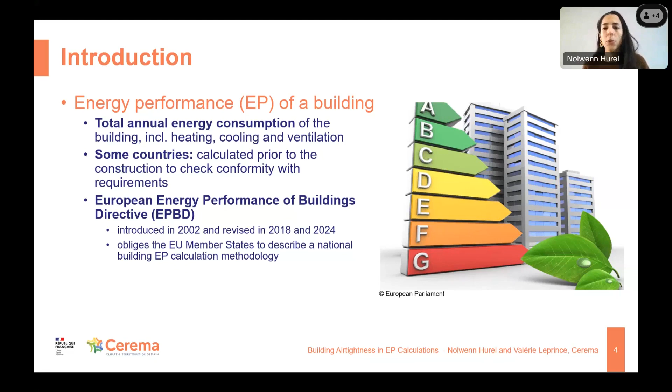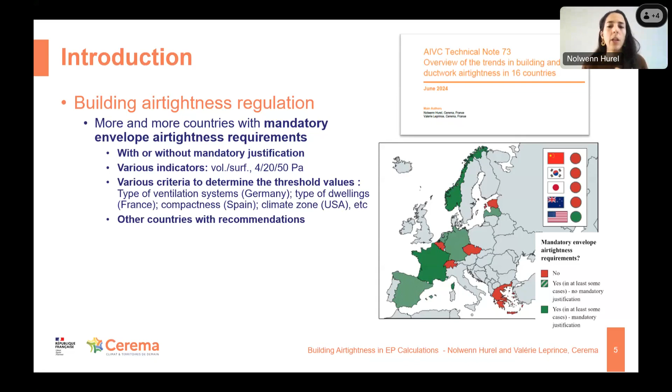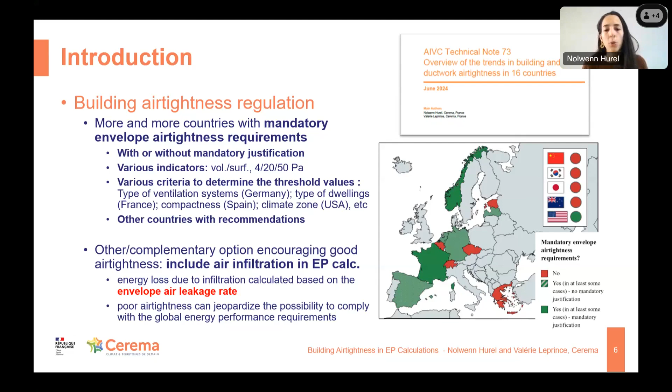Another, or complementary, option to encourage airtightness is to include the air infiltration in the energy performance calculation of the building. For this, the energy loss due to infiltration is calculated based on the envelope air leakage rate. This is how airtightness is included in the EP calculation. Then a poor airtightness can jeopardize the possibility to comply with the global energy performance requirements. So this is how it also encourages good airtightness.

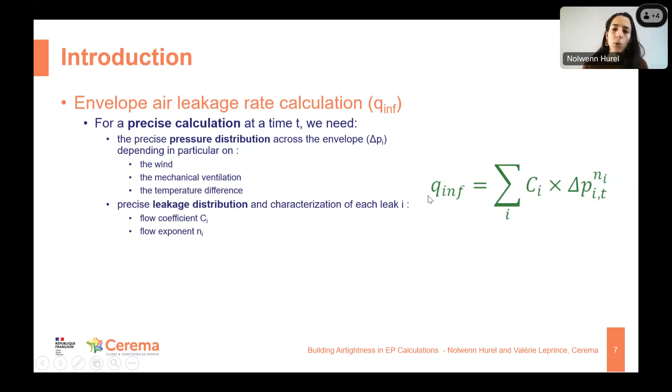So as I said, we need to calculate the infiltration rate to have it inside the energy performance calculation. For a really accurate calculation of this infiltration rate, we need the precise pressure distribution across the envelope, which depends on the wind, the mechanical ventilation, and the temperature difference. We also need a precise leakage distribution and characterization of each leak, so the flow coefficient C and the flow exponent n. So in theory, we should sum up the leakage of all leaks to have the total infiltration. But in practice, this is quite impossible.

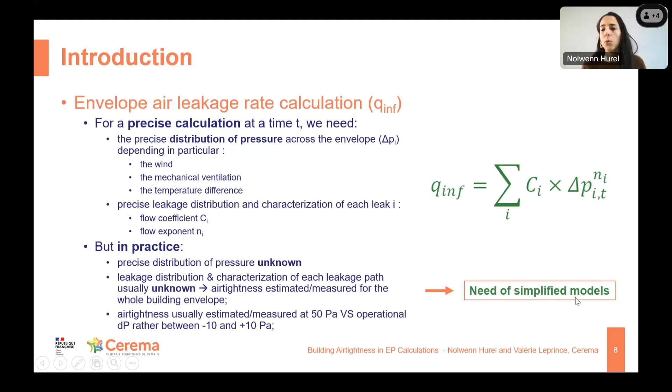We don't have a precise idea of the pressure distribution of a random building, and we don't know the leakage distribution and the precise characterization of each leak. So usually what we know is a global estimation or measurement of the whole building envelope, usually at 50 Pascal, whereas the operational pressure difference is rather between -10 and 10 Pascal. So for all these reasons, there is a need for simplified models to include this infiltration rate inside energy performance calculations.

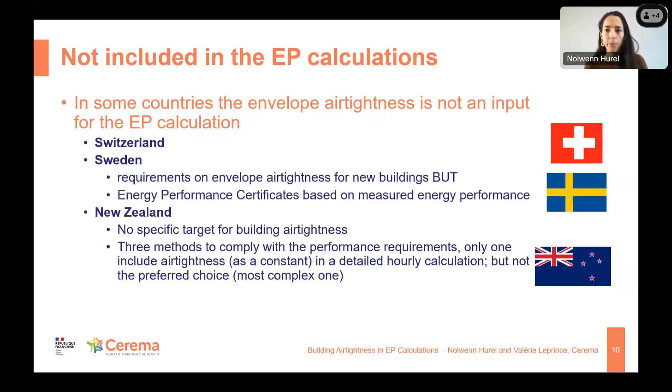Now, for the countries that do include infiltration and airtightness in the energy performance calculations, the simplest model is the leakage infiltration ratio. It is a linear relationship between the infiltration rate, the estimation of the real infiltration through the year, and the leakage rate at 50 Pascal, which is what is usually estimated or measured on site. It is used to estimate the building steady state infiltration heat loss, usually applied in semi-steady state calculation methods. It gives a quick estimation, but with significant limitations, as it is very hard to define the proper N coefficient.

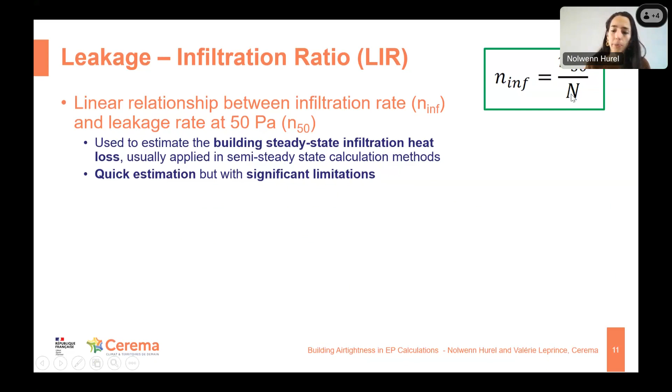One country that uses this model is Belgium. So Belgium is an interesting country for airtightness because they do not have a requirement on minimum airtightness level, but they have a very disadvantageous default value in the energy performance calculations for airtightness if there is no test performed. So as a result, in Flanders, they have a requirement on the global energy performance that the building must achieve. And because of this very disadvantageous default value on airtightness, all buildings are actually tested to have a better value and to be able to comply with the energy performance calculations.

And the coefficient they use in Belgium is 25. But of course, it will be more or less correct depending on the buildings. In Finland, this coefficient depends on the number of floors, ranging from 35 to 15, 35 for one floor to 15 if there are more than 5 floors.

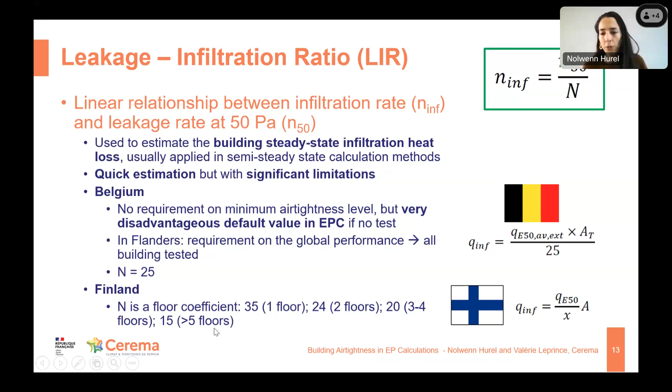And now there are other models that are more complex. We call them the simple infiltration models. So they take into account more parameters, usually time-dependent ones. They are more complex, but also more accurate than the leakage infiltration ratio models. And one example is what is done in the UK. So the coefficient used is 20, but there are monthly correction factors to account for wind fluctuations. And I won't say more than that because Xiaofeng will present right after me in detail what is done in the UK.

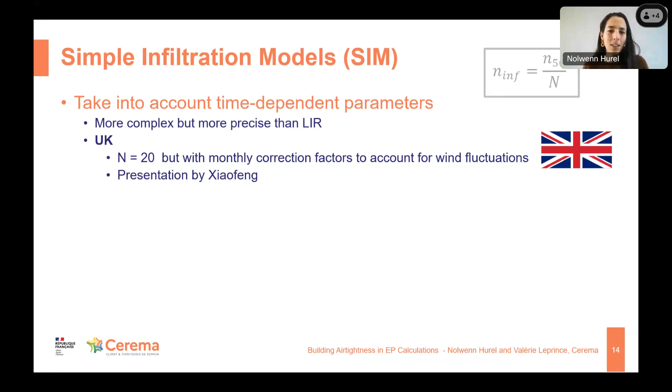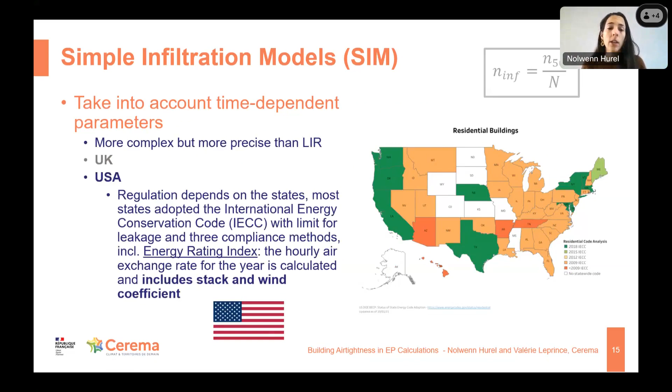And also in the US. So it's hard to talk about the whole country as the situation is different in each state. But most states have adopted the International Energy Conservation Code with limits for leakage and 3 compliance methods, including the Energy Rating Index, that is the hourly air exchange rate for the year that is calculated and that includes the stack and the wind coefficients.

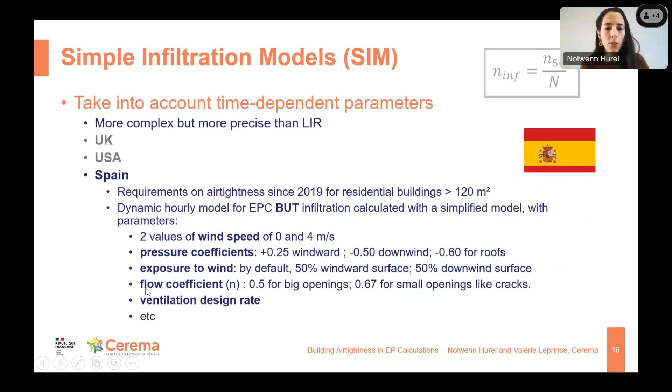In Spain, they have requirements on airtightness since 2019 for residential buildings that are bigger than 120 square meters. And then for the EP calculations, they have a dynamic hourly model, but the infiltration is calculated with a simplified model with various parameters. So 2 values of wind speed, given pressure coefficients, exposure to wind, flow coefficients, and ventilation design rate.

And finally, the most complex model that is used is the equilibrium pressure model. So in this model, the pressure is calculated by a mass balance equation. So it's more complex, but more precise than the 2 other models presented, the leakage infiltration ratio and the simple infiltration model. The calculation is performed at a time step, often hourly. And it requires an estimation of the pressure and the leakage distribution.

Valérie will present this type of model after the presentation of the UK. And Jiri will present what is done in Czech Republic. So they use this kind of model. And it is also used in France in a very similar way to how it is done in the Czech Republic.

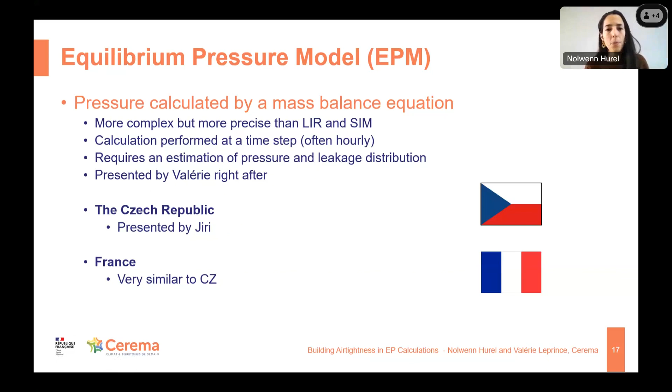So, as I said through the presentation, the various models have different levels of complexity, but also of accuracy. And there is one study that has been done by Happle et al. to try to estimate the error due to the use of these different models. So they made a test on 24 Swiss buildings. And they compared 2 models, one simplified infiltration model from Germany, and one equilibrium pressure model. And they found out very significant differences.

So the graph you see here, it's the difference in the annual heating energy demand. So it's the total energy performance of the building. And you can see that the model choice can drastically affect this whole energy demand at the individual building level. So they found out that the annual heating demand was reduced with the equilibrium pressure model for all buildings but one, with an average reduction of 11.6%, which is, I found, very significant, and a maximum reduction of 65%.

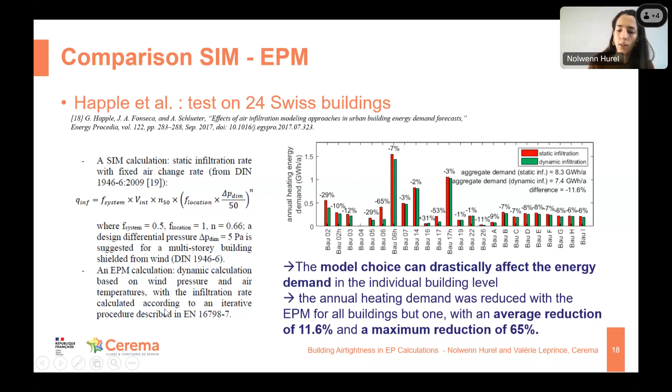So you have here a table as a summary of what I presented. So each country has a different approach on airtightness. Some have requirements directly on new buildings, the requirements on the airtightness they should have. And others, they don't have these requirements, but thanks to the implementation of airtightness in the EP calculation, they can encourage a good airtightness. And as I presented, each country has a different way to introduce the airtightness in this calculation with models of different complexity and different accuracy.

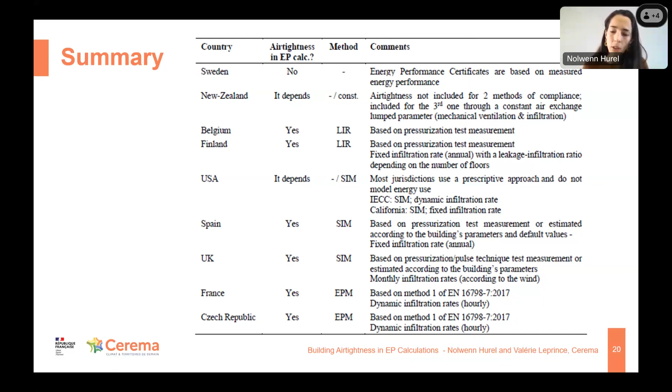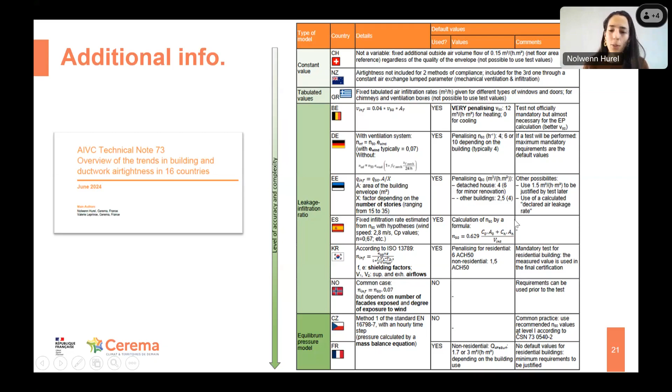That's all for me. If you want to have more information on this subject, please don't hesitate to check the paper that is available on the AIVC website.